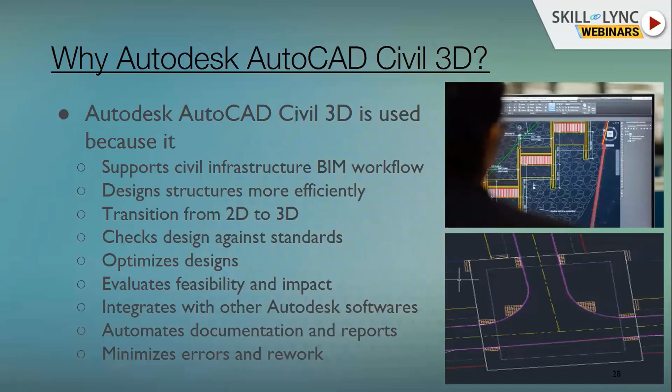It compares in 3D as well as 2D, so that we can visually see where we are standing in the design, and it makes our work much easier.

There are also lists of parameters we can use. As I was saying, documentation to delivery standards will be made smoother, and we can configure and customize those parameters as needed.

We can deliver 3D models directly to different machines. Once we do this, we can give it to the surveyor or the contractor, and use those 3D parameters for his automated machines for construction of the road. So that also we can do very smoothly.

Apart from that, there are multiple software which do highway designs. We can export from that software and build this into the Civil 3D application in response to project changes, because all the features are interconnected - we can run through the process very quickly.

Again, when design changes, it automatically updates, and provides better estimation of materials and dynamic calculation - those analyses also we can make.

It shares and updates the model in real time, because nowadays clients expect all models to be uploaded to their cloud. We just work directly in the cloud, so that whatever changes we make will be uploaded and checked by the clients directly, without any separate submission. Only through emails we can communicate that the model is updated, please have a look, so the client sees the design updates in the cloud.

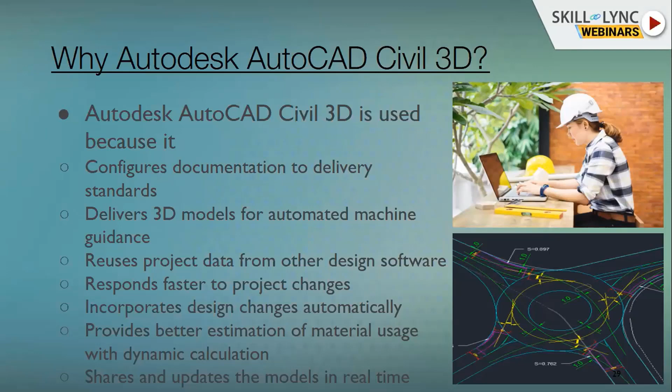Those are the multiple advantageous things we can achieve using these applications.

Next, I will try to show the workflow of Civil 3D applications - the standard template. It's not compulsory to follow this process, because around 80% of the time we will follow this process only, since of course every project is unique, every project is different. So we need to take the project with their priority, give the input to Civil 3D, and design.

But overall, there will be a standard procedure we need to follow. That process I'll be explaining in the following slides - AutoCAD Civil 3D workflow basically.

What I try to say is AutoCAD Civil 3D features a range of design and analysis objects within the three-dimensional dynamic engineering model. It gives an option for a designer or analyzer to make his decision on how to go about a road project in a standard manner, so that it can give the best, safest design to the end user.

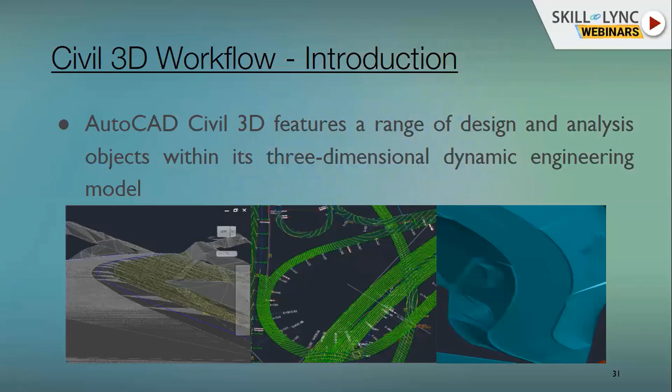So the basic workflow will be: whatever survey data we need for the design of the highway projects will be collected first. That may include points, lines, surface, alignments, or even the corridor directly. So that can be imported first, and we try to do the design accordingly.

All the objects of Civil 3D have a hierarchy that can be viewed in the interface component called the tool space. As I was explaining in the overview slide, everything will be controlled in the Civil tool space command, starting from the survey, alignment, corridor, and the report generation.

So once we familiarize with that, the next parameter we need to do prior to going into further steps will be the label styles and edit label styles, which is very important. It decides how the cross section looks, how the DTM or road surface looks, how the alignment looks, how the corridor super elevation or visibility looks, or how the final output like the drawing looks. So all these are controlled by the label styles, which we need to prepare first.

Many times, each consultant will have his own set of style sets which they use as standard. So they will create it separately, and we use this for all the projects. So we need to create it first. That can be controlled using these setting commands.

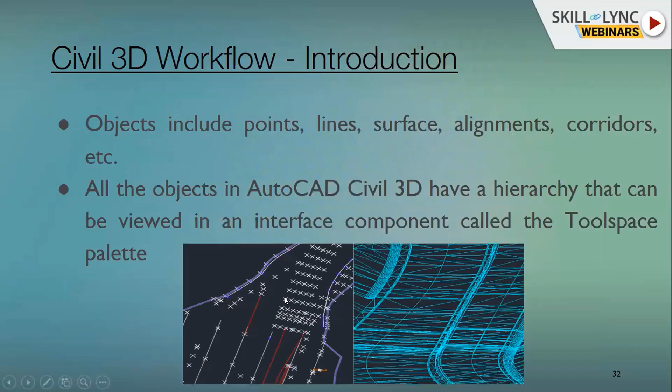So that data we can use, or sometimes the surveyor gives you the AutoCAD file. That file has points which are 3D, three-dimensional points, like in the previous slides. For example, these are the points - we can use them directly - and these lines are called break lines, which we can use to generate the DTM or the triangulation, what we call in technical terms, to create a DTM or the survey surface.

Another format will be the Land XML format. This will be an important export format of Civil 3D, where we import survey data from other design teams. We can just take their design or their data directly into our Civil 3D applications.

So for all the parameters shown in the Prospector tab surveys, these are the scenarios where we can import all these parameters. If you just right click in this portion, there is an option called export to LandXML. So you can export a particular survey created for that region, or a particular alignment or corridor, and export it in LandXML, and use these features in other drawings, with other designers or clients, whatever it is. So that's one import method.

The other will be Genio. Genio is nothing but other applications in the export system. We can upload that by using separate toolbars where we need to do add-ins. Add-ins are extra features in Civil 3D where we can add other applications to Civil 3D. For example, if you are adding a vehicle tracking system, it's separate software developed by Autodesk that gives you the path of vehicles, how they go through junctions or a curve exactly. That we can install separately using add-ins, and do the designs.

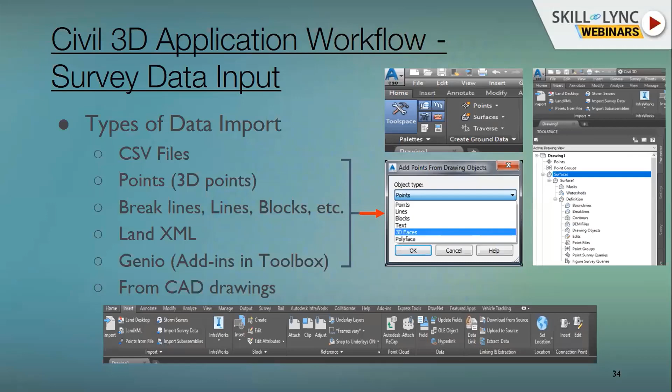So that I would like to share at this point of time. The other option is from the CAD drawing directly, we can just import the survey data here, because of course this is a CAD platform. It runs in the backend on AutoCAD only, so that we can take care of in this design. So moving forward quickly, these are the processes I'd like to share, like CSV point import or drawing object import. What are the steps we need to follow in this one? So this is the procedure we follow.

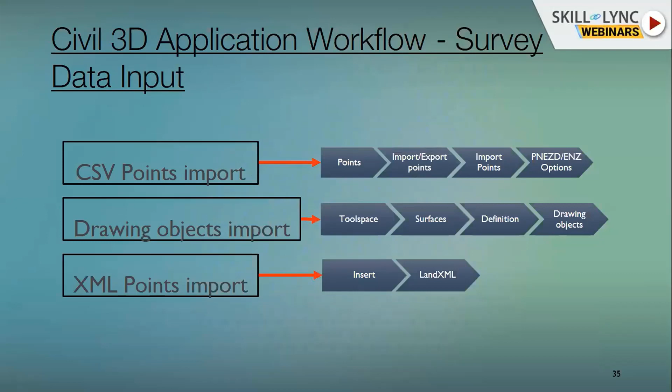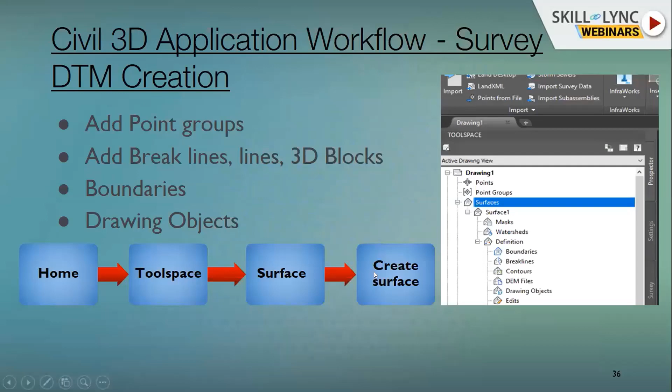So again, it will be how we import the survey data - the steps I'll try to share here - how we can create the surface. Once the surface is done, we quickly move on to the horizontal alignment. As I was showing, the central portion gives all the details about the alignment. If you click on alignment, it gives a drop down. It has many options for creating the alignment. What we need to know is it's just connecting those two lines straight or as a curve in a different manner. So all these options can be explored or used in this toolbar to create an alignment here.

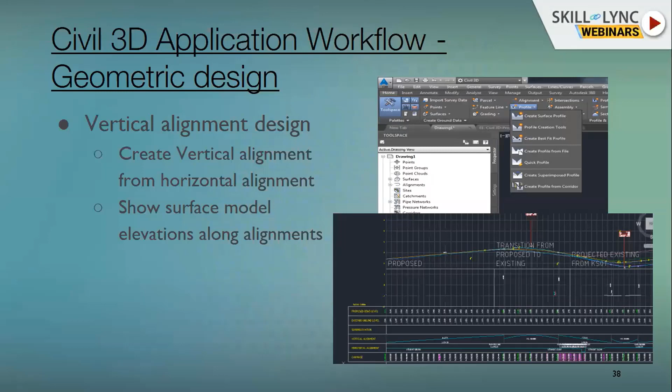So those two parameters we need to take care of while designing the vertical features as well. It's very user friendly, very direct to approach. The only basic thing we need to know is what are the scenarios, or what are the standards we need to use, like grades, minimum grades, maximum grades, sag, hog curve, k values. If you know those parameters, we can directly chip into this one, which gives all the instructions in a user friendly manner. So it's very easy to use.

So next, once we're done with the vertical, we will directly chip onto the corridor model. In this slide, in the smaller portion, I've circled the corridor options. Once you click that, it gives so many features to develop a corridor section. Corridor is nothing but the cross section we need to develop in this section. So how we decide which corridor we need, that has to be done in the assembly sections.

So in the assembly section, once you click this one, this is the assembly developed for the particular project, where this point will be the center point of the road. Then we need to create a lane. To create all those lanes, we need to go back to the palettes. At the moment, unfortunately, I don't have that tab. So we call it palettes, which will be here, exactly this point. If you check this, it gives different options of carriageways, lanes, shoulders, width, verge width, embankment, barriers, footways, curb. All these assemblies will be there. We join together the assembly and sub-assembly, and we create an assembly.

In Civil 3D language, we call it assembly and sub-assembly. Assembly will be this whole part. Sub-assembly will be each parameter, like a lane, a curb, or an embankment, whatever it is. So those are all sub-assemblies. We join them together to form an assembly.

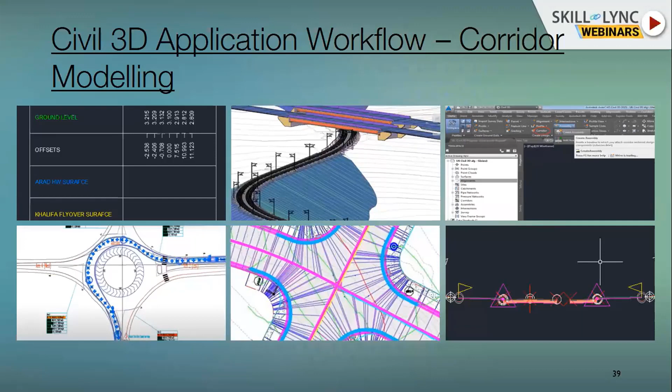That assembly we need to run through the corridor for that particular alignment, particular profile, particular ground. Once we do that, it creates a corridor for us, which gives the cross-sectional design. That's how the process works. It's a simple process to follow, very easy to use, and very user friendly, I would like to say.

Next I would like to talk about super elevation. Super elevation is of course one important factor for designing any corridor model, corridor or cross sections. Civil 3D has a separate tab for super elevation.

Here you can see, once you develop the corridor, if you click on it, it gives some more options in the ribbon bar for analysis and change editing purposes. We can edit the corridors in a million ways. In that option, we also have the option called super elevation.

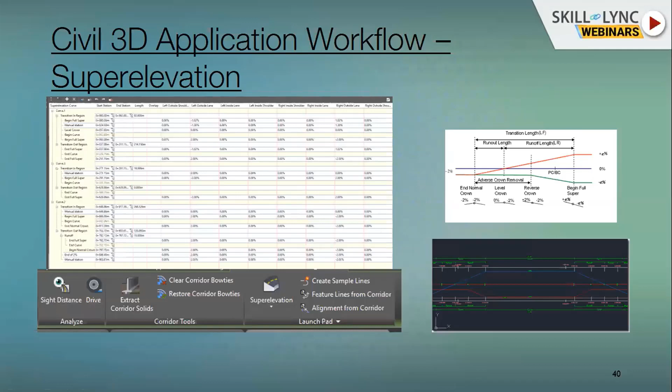We can control super elevation here, depending upon the carriageway, and the chainage we can feed in. There are different kinds of lanes, like 4-5 lanes. For each lane, you can place the percentage values directly, as shown in the image. Each lane has a different percentage for different sections. Calculation has to be done, and we place those values, which are used for export purposes. So those are the basic things we can do, but it's very flexible. We can easily feed these values and do the super elevation analysis and design very quickly.

Next, coming to the Civil 3D visibility feature, which is useful maybe in a junction, or a vertical curve or horizontal curve, we need to check visibility. For that also, depending upon the standards we use, we can use this item in the analysis tab and do the visibility parameters as well.

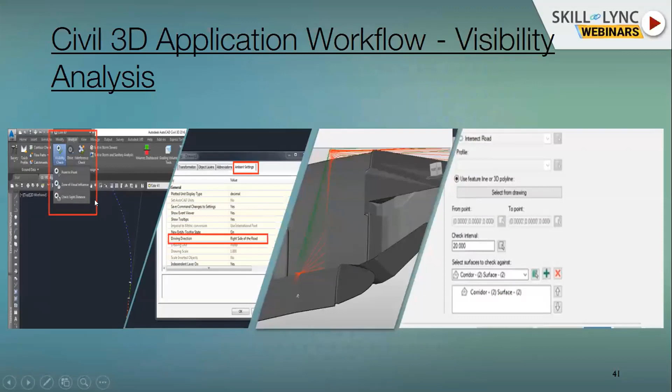Coming back to the volume calculations, again in the analysis tab, you can have the dashboard for volume calculations. It is of course user friendly. It gives basic details, asking about the ground, about our design ground.

So both we can just compare all together and put into a sheet of information, and we can just get the quantities very easily. We can do it section wise, or as a whole project area. We can do multiple options, very flexible, very user friendly. We can just do this one.

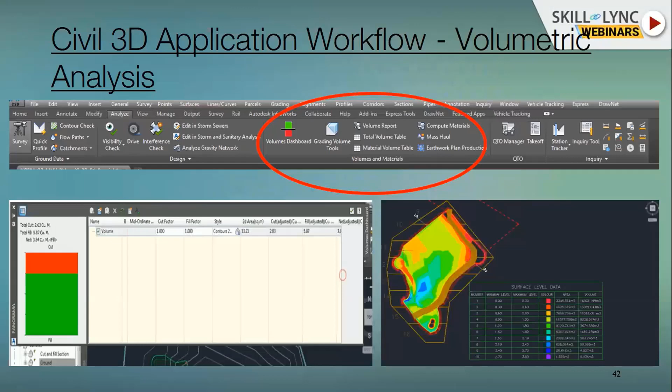So finally, the report generation will be there. As I said, in the toolbox we have this option called report generation. As you can see, there are multiple options for report generation. We can give it for horizontal curve separately, design criteria, what we use, all those parameters, setting out, or the stations, all these design parameters, we can take it out from the Civil 3D applications. Very neatly presented.

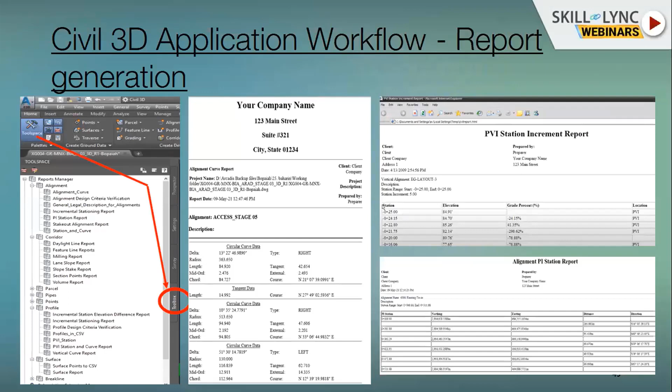We can just customize it in the process however we want. We can export it into PDF or export into Excel format for further calculation, further analysis. All those parameters we can do in this report generation.

So this will be the final drawing output. This is the example I would like to show. Each consultant firm or client firm has a different set of drawing output format. So in this case, I would like to typically show what will be the plan and profile output. We just developed this one in AutoCAD.

So if you are using AutoCAD, you may know the feature called XREF - external reference, calling up different drawings using that command. Using that, we develop these cross sections or the plan and profile drawings for the final outputs.

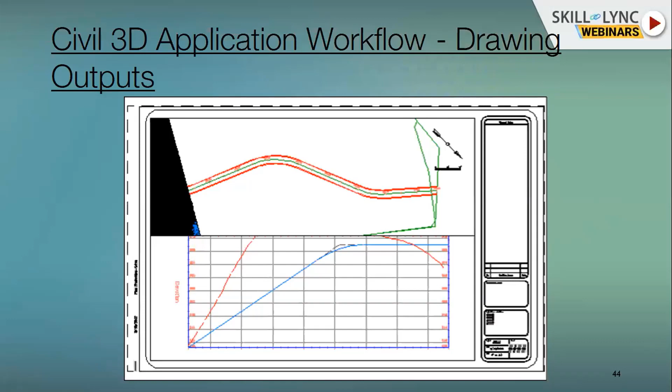On the right hand side you can see we can give any legend, key or notes, or parameters like stages of drawings, different stages, client name or consultant name. Those are the basic items like project name, drawing number, the scale. Those are the parameters we finalize here and set a sheet output. That output can be used directly using the XREF. So those are the advantages we have in Civil 3D.

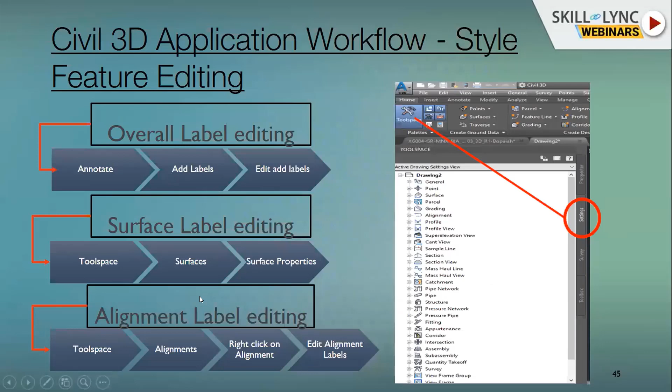The other features I'd like to show here are a couple of other features like grading and pipe network. Grading is nothing but if you want to have a constant slope between two different elevations or between two different surfaces, we can use the option called grading. Pipe network is a three-dimensional thing where we can use it for development of the underground sewer network, water network, or the OFC cable network. All those options we can additionally do in this one.

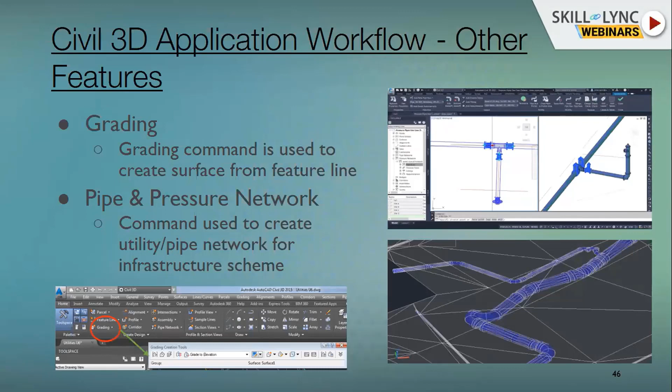Apart from that, we have rail design as well in Civil 3D, that's also advantageous for these applications. So that being said and done, that is the basic process we follow in this Civil 3D workflow.

Similarly, we used one such template to create a model intersection design for our case study. I'll go through this project briefly. Basically what we followed is these steps: the template, importing the data, creating the surface, creating the alignments, corridors, modeling it, doing the super elevation, doing the visibility check, and finally the report generation and the drawing outputs. Those are the basic procedures to be followed.

Brief about this project - you can see this is a roundabout, an intersection roundabout. The intersection at the roundabout will be developed into a grade separated interchange because of the increase in traffic and future development. Because of the analysis and planning, we concluded that it requires a grade separated road, because with just a traffic signal we can't control this huge amount of traffic.

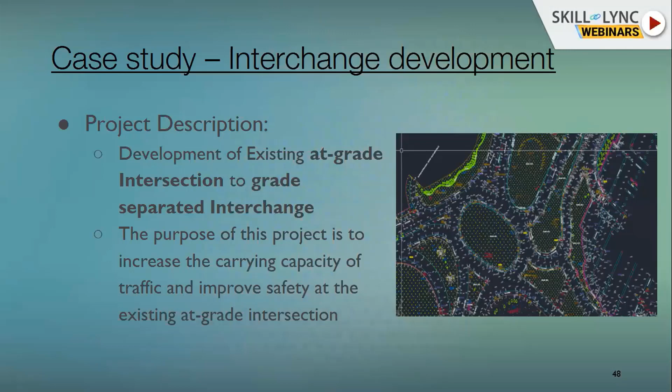It would create more traffic timings. So to avoid that, we use the grade separated interchange, and we did the analysis and design for this one. This is one particular junction from that site - we took it for our development purpose, and all the points and text you see are the existing survey data we received from the survey team. That has been plotted into the AutoCAD drawing directly.

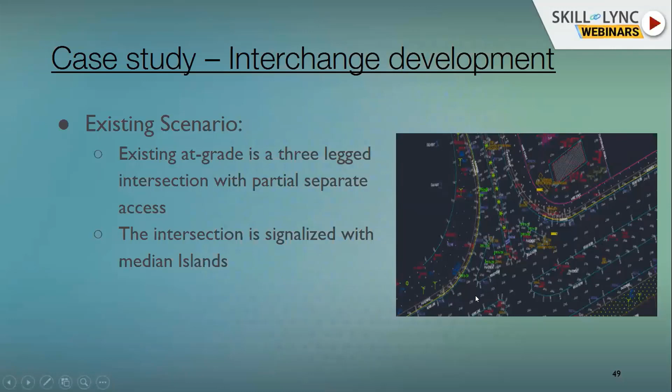So we use this data. It will be all in 3D format, maybe 3D lines, or points, or text. All will be in 3D, with elevation at each point. So we use that data for our design as well as modeling purposes.

The first format will be development of the existing ground scenario. So all the data we have, we developed in Civil 3D applications. We call all the points, call all the lines, and the text as well, since in some places we require that.

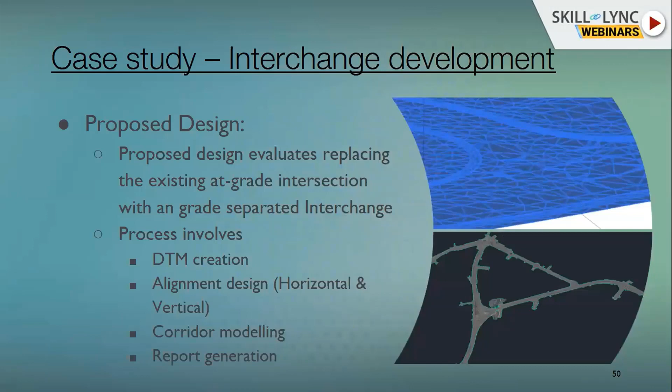We need the base first, and that base will be the existing ground surface. So we need to analyze the scenario first, how the ground will look like, to further do our design of alignments in interchanges and all. That's what we created first, using the Civil 3D applications.

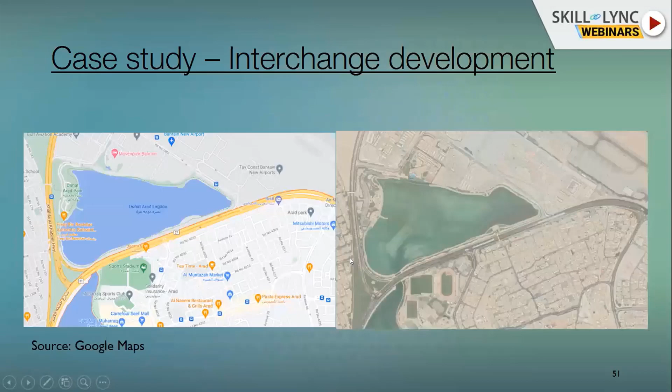This project site is basically taken from the street Google map, as well as the satellite image. You can see a junction here, which will be developed into the interchange. So this has been developed into an interchange.

Here you can see this is a 2D plan, but in 3D reality, the roads - this is the main carriageway, dual carriageway, passing directly through the road. These are the connecting elevated interchange, which is grade separated, going above or below the main carriageway. That development has been done using these applications for this interchange design, using the parameters mentioned in the earlier workflow.

Of Civil 3D, basically what we did is we had the existing ground, and we designed the alignment using all these features, and the vertical profile depending upon the interchange standards we need to give. That depended on the carriageway as well as the design standard of that particular area.

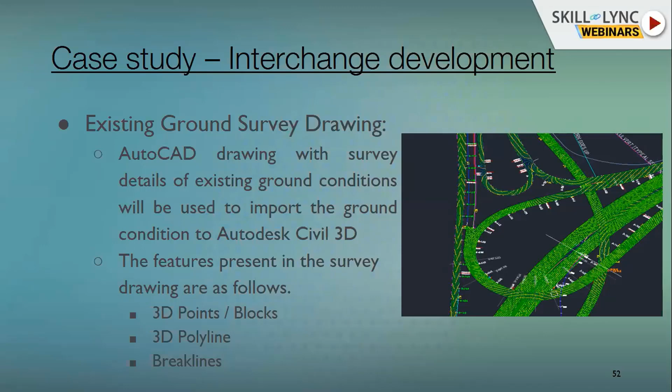We developed the corridor model using the assemblies and sub-assemblies features of Civil 3D, which has been uploaded into this design. Finally we clubbed all these parameters, and created a contour map for this particular junction, using all these parameters in Civil 3D only.

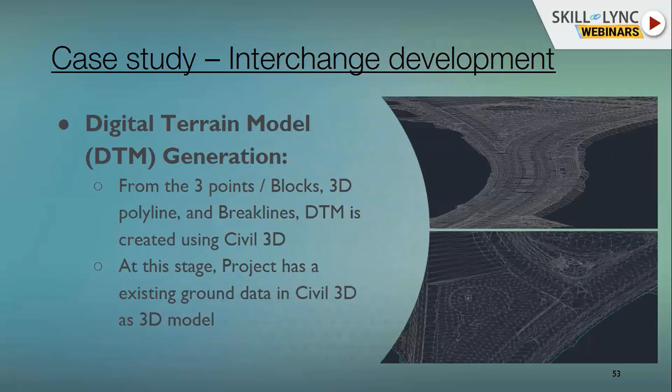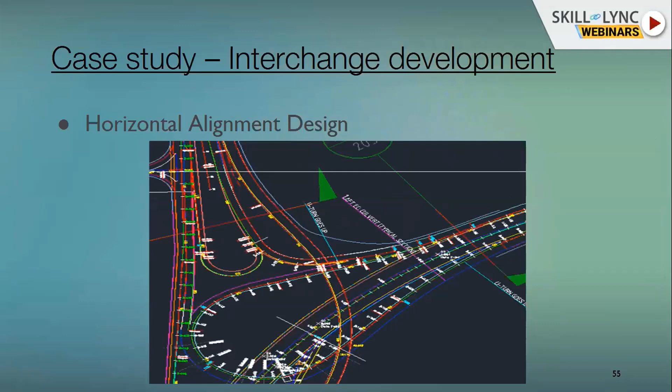The final DTM generation for the proposed design also needs to be provided - whatever we construct, whatever we design, will be surfaced in this model. So this is the horizontal, how we developed these horizontal parameters - these are the basic ideas. All the features used, we use Civil 3D only for this one.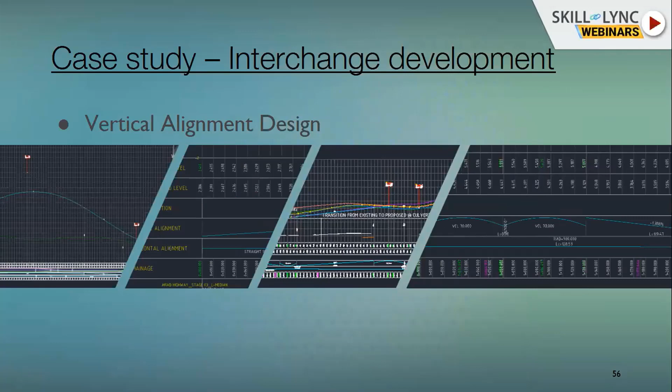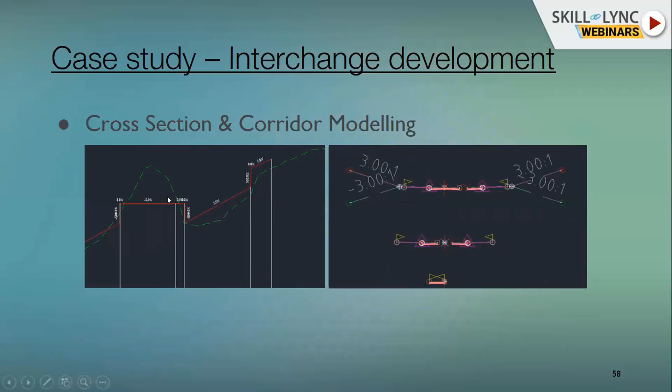The approach may differ for different projects, but the concept remains the same for highway projects. This is the vertical alignment design, and the cross section corridor modeling. This is the assembly point, and these are the cross sections. Finally this is just a section of that project where we try to develop the model of the junction.

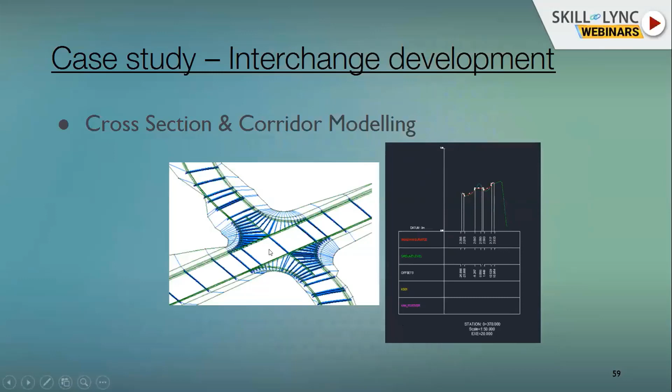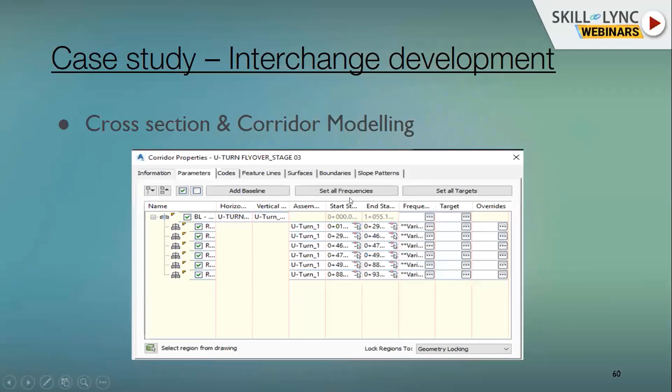This is the corridor model analysis we did for different regions. We had different assemblies to provide, so that we can control everything here. These are in-depth knowledge - once we start using this application, terms like frequency target, horizontal vertical things, assemblies, baselines, frequencies, all become familiar standard words once we start using these applications.

Finally, what we try to show here will be the design contour plan, report generation, and drawing output. These are the three main parameters the client asks for at the end of the project. For that, we try to keep it as simple as possible for the clients, so it shouldn't be complex for anybody to use at the end point. What we give is minimal and basic, but it has all the data in it - that's what we aim for at the end.

So we don't do it in a very complex manner. Complexity should be there in the design, but at the end, we need to give it as simple as possible. For that, we just give these three details.

The contour plans give all the details of how smooth the junction design is and how it will be used. The drawing gives the horizontal, vertical, and cross-section parameters to the client. The report shows how the horizontal values, vertical values, and super elevation values are being used. Those are the parameters we can give.

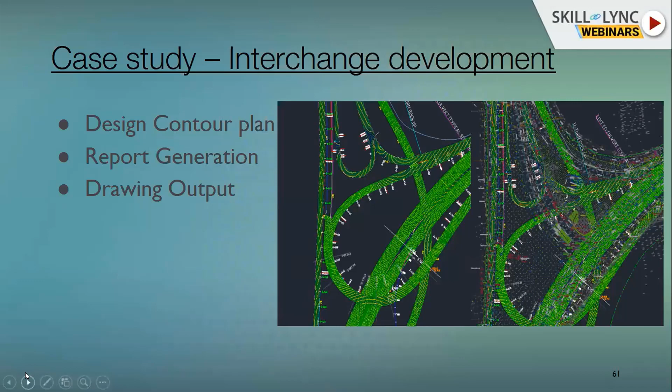Finally, report generation is set as I showed earlier — we can easily create the report generation in Civil 3D applications.

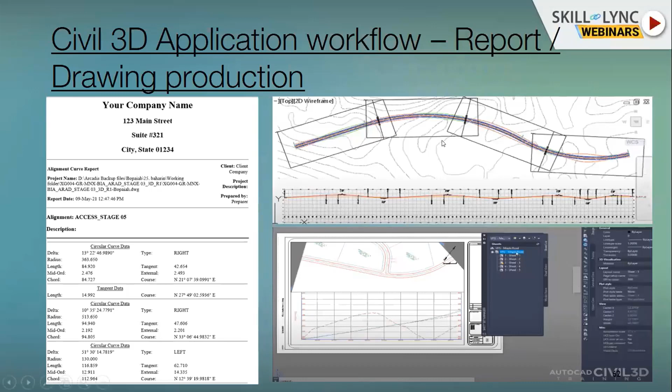Next comes the last part, the installation process. We can go to the Autodesk website, which gives all the details about how to download it, how to install it, and how much we need to pay to use the application. We can easily download and install this version. It has a Mac version as well as a Windows version, so depending on the type of OS you're using, you can set those parameters.

To sum it up, AutoCAD is a very vibrant and important application. We can use it especially for the highway engineering field, so there's a huge advantage in using this application, I would say.

At the end, anybody can learn this software with basic knowledge of highway engineering — those horizontal features I was mentioning in the codes. If you know that language, using this application is very easy, because nowadays technology has improved. We have video platforms like YouTube, so if you just Google what you want from Civil 3D, it appears instantly and gives a brief idea about how to use it with basic ideas.

Also, having a different skill set is another factor. As I was saying, it's a very popular application to use at this point, so we can use it very easily. At the end, I would like to conclude that knowledge about this particular software helps in the job market as well, because it's a happening software in highway engineering consulting firms.